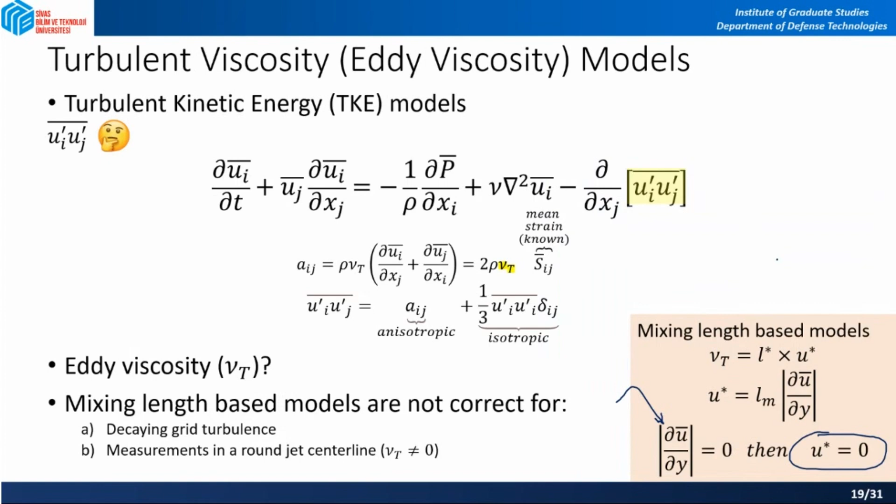Especially, it is found over the years that the mixing length based models are not correct for decaying grid turbulence and also measurement in a round jet center line where your nu t is not equal to zero. Therefore, these models have some kind of inconsistency. So people started to look for other types of approaches. Instead of using the equation u star equal to lm du dy to calculate u star, people suggested to use turbulent kinetic energy, K.

And you know that its unit is velocity squared, meters squared per second squared. So people say okay, let's take its square root and calculate the characteristic velocity u star from there. So the square root of k times some constant will give you the characteristic velocity. This was a starting point of all turbulent kinetic energy based turbulence models. This was even proposed long before the actual computer implementation and development of K epsilon models and everything. It was, in fact, proposed by Kolmogorov back in 1942 and also by Prandtl back in 1945, to calculate the velocity scale U star.

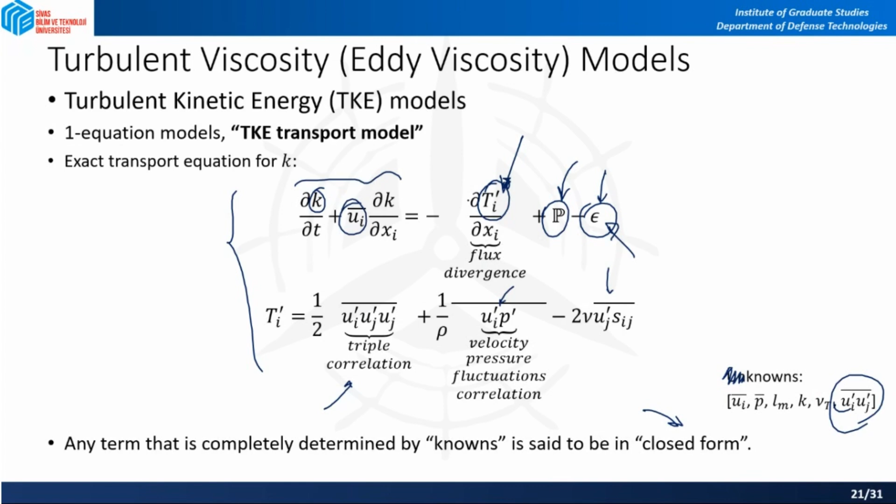For example, the list of knowns, the list of variables that we have: ui bar, p bar, lm, k, nu t, and Reynolds stress, ui prime uj prime bar. Closed form is actually a technical term. For example, production P is in closed form, meaning that it is calculable with the known variables during the integration of equations. Actually, this is not unknowns, this is knowns. But epsilon and also ti prime are not in closed form. When you determine which terms are in closed form and which are not, you can develop some studies accordingly.

Again, look at this equation. In here, the whole left-hand side is in closed form because you already know your k, you already know your velocity distribution. So I can write the whole thing in here as capital Dk/Dt, and also the production are in closed form. They don't cause any problems, but you have the gradient of ti prime and you have the epsilon that are not in closed form, and you should do something about these terms.

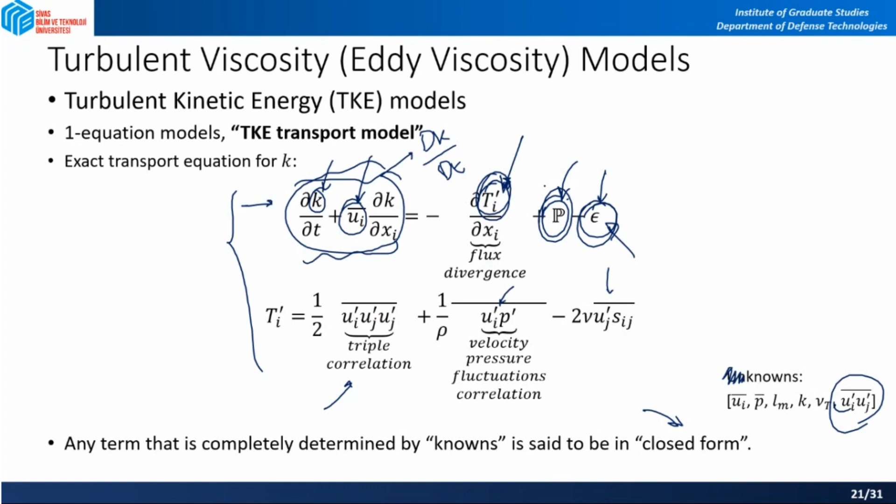Okay, there are two ways to tackle this problem. One way is more or less a spectral way. So we don't know epsilon; let's produce another partial differential equation to solve for epsilon. The equation we are talking about is the k equation, and in addition to this equation, you will introduce another equation that solves for epsilon, and those models will be called two-equation turbulent kinetic energy models. Before going there, we can also do something simpler.

We can propose another equation, but this equation is not a differential equation to calculate epsilon. Okay? The idea is this. From all the physical properties we have discussed, we know that the order of magnitude of epsilon is u0 cubed over L0. You remember that u0 was your integral velocity scale, L0 was your integral length scale. So using this simple argument, we can propose a simple equation to calculate epsilon.

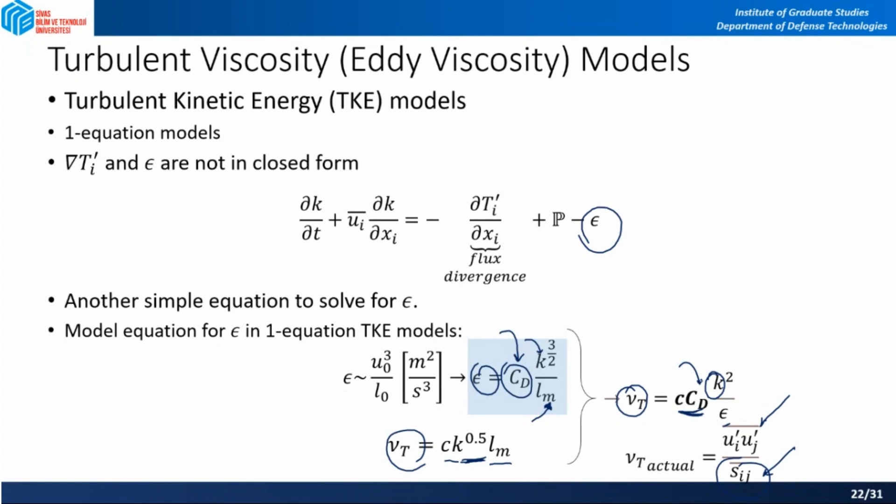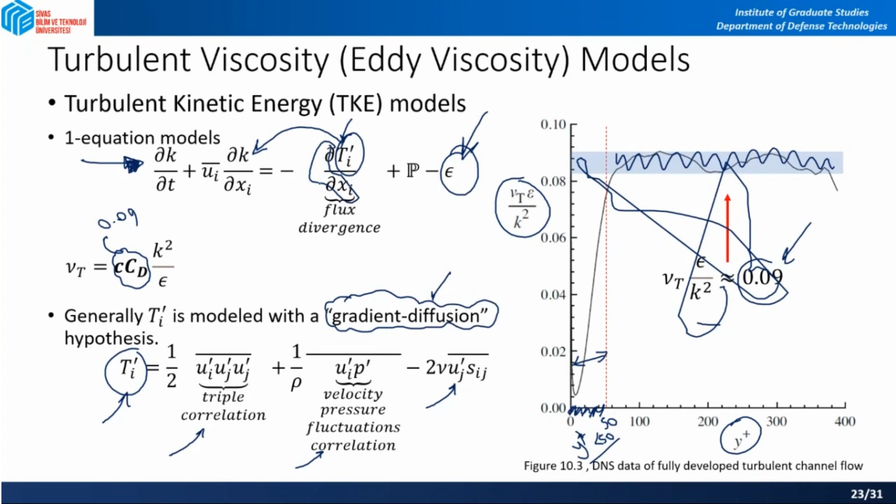Okay, people said that if this Ti prime is a flux term, the diffusion of this flux term should occur along the gradient lines of k. What I mean, if k is, let's say, high at some point and it is low at some other point, k will flow in that direction, right? As well as Ti prime. So Ti prime also flows in that direction.

We don't question how this flux is produced. We accept that there is a flux, then we say that this flux will follow the k gradient. Okay? The gradient of k will be a vector. You remember the gradient of pressure, which is a vector with direction. So this is the same. It has three directions. So we say this flux will follow that direction.

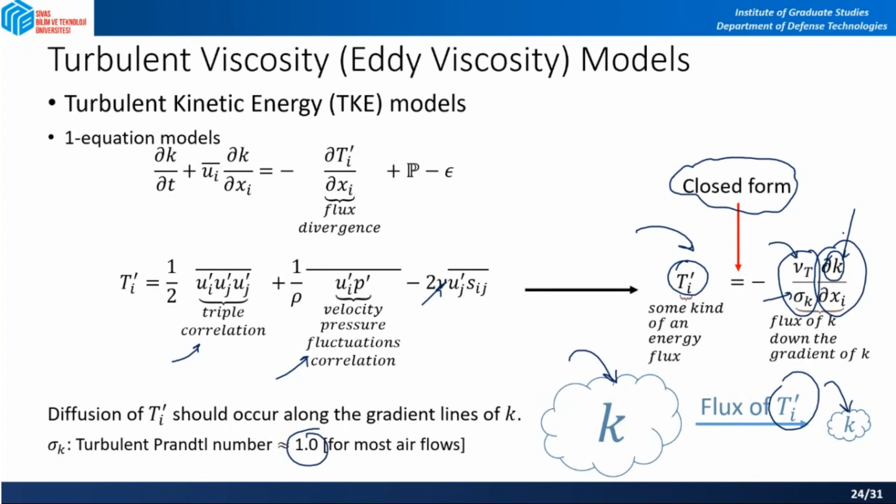And at the end, we arrive at the model transport equation of k. So in here, we just solved the epsilon problem, and replaced Ti prime with these. So right now, this is a complete set of equations for this model transport equation for k. This is a one equation model since there is only one PDE in here, and there are two algebraic equations, so they are simple and very quickly solvable numerically.

But the one equation model, similar to the algebraic model we discussed before, is still incomplete due to LM. So you have to again pre-specify the mixing length at the beginning of the solution. The solution to this problem came in the early 1970s, and the idea was, let's keep the model transport equation for k, and instead of simplifying epsilon, let's derive another transport equation directly for epsilon and solve this.